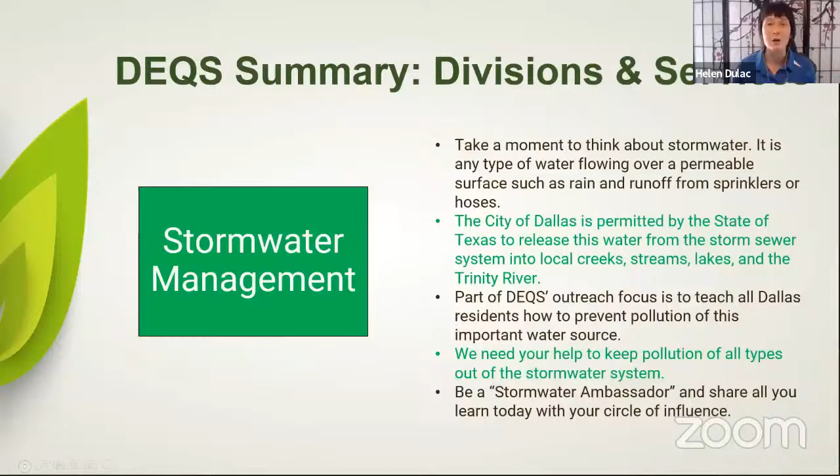So please just be mindful about what you're doing outside. Try to pick up that pet waste and also don't litter. And that's going to really help water quality for us and people along the Trinity.

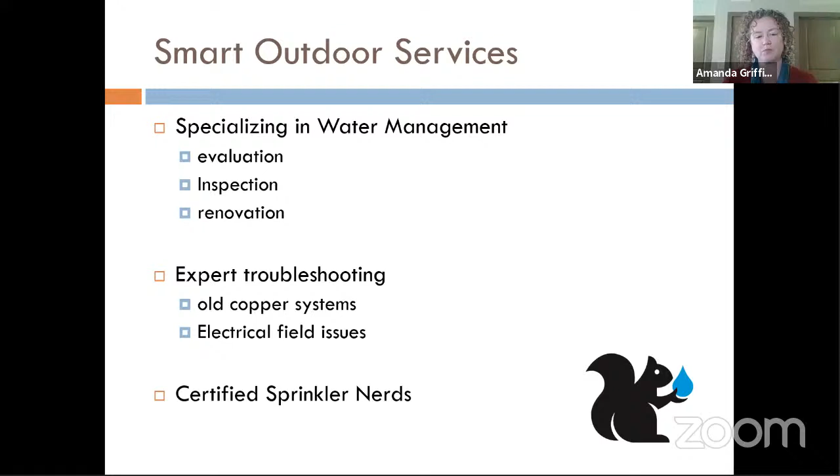And we're definitely certified sprinkler nerds. I always tell this story. When my daughter was about 6 years old, we sat down at the table to eat dinner, and she said, "Okay, what are we going to talk about other than irrigation?" Because my husband and I were talking shop all the time. So she put the kibosh on that, and we talked about something else. But we're definitely sprinkler folks all the time.

So today we're going to go over the basics of an irrigation system. I'm going to show you some of those things that if you have an irrigation professional come to your house, these are the things that they're looking for, they should be looking for. And I'm going to talk to you about what each type of component on your irrigation system does. We're going to talk about how each of those can lend themselves to water management. And then we're going to talk a little bit about troubleshooting.

I'm going to cover a little bit more troubleshooting in our next segment, along with some really good specifics about creating a really good irrigation schedule with your controller. So tune in for that next class on April 8th. But today I'm going to give you a great foundation so you really understand what your irrigation system does.

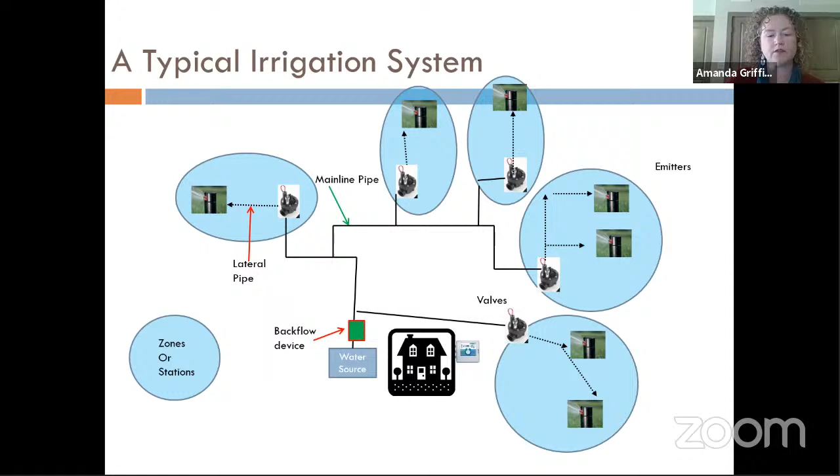So let's go to the next slide and talk specifically about our emitters. I'm taking you from the end of your system back to the beginning. We're working our way back. So first thing we're going to talk about is emitters. Emitters are basically just where the water comes out. There's several kinds of emitters: rotor heads, spray heads, micro emitters, and drip are also considered emitters. We'll talk a little bit about drip in just a few minutes. There are a lot of options in your emitters that can help you save water. The technology in irrigation has evolved to support water efficiency so much in the last 5 to 10 years that even if your irrigation system is just 5 to 10 years old, there's probably opportunities for you to retrofit some of your components and save water.

I'll give you an example. We retrofitted a system recently, a large HOA, several zones. We put pressure regulated rotors on those zones. So we took the old rotors off, we put the new pressure regulated rotors on. We ran a pre-test to see how much water those zones used before our project. We ran a post-test to see how much water those rotors use post-project. The savings was 34%. Those zones ran 34% less water with retrofitting just the rotor heads.

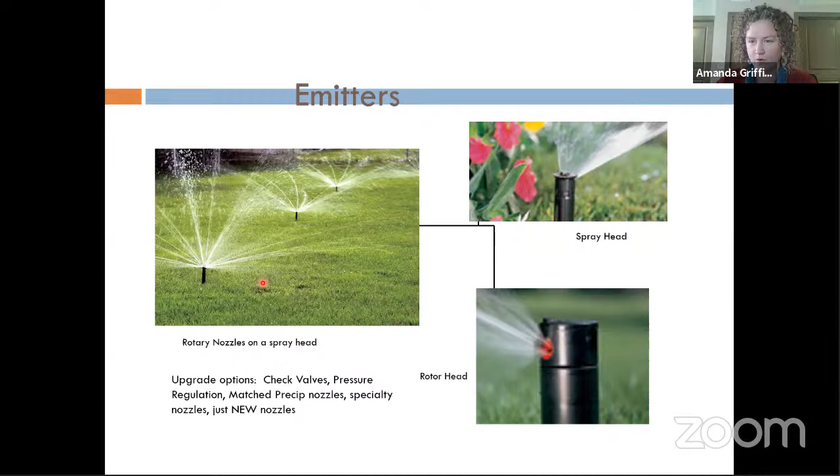But I tell people the bits and pieces that we use as irrigators, it's all little pieces of plastic. And so the price that you're paying for an irrigation upgrade or an irrigation retrofit or even an irrigation repair, the cost of the part is so small, but being able to pay someone with the expertise to use the right part in the right place is really what you're paying for with irrigation service. So, to switch from the very cheapest nozzle to a more efficient upgraded nozzle, you're looking at just a couple of dollars per nozzle sometimes. So I would say buy the most efficient technology you can afford, and it's going to help you in the long run.

There is a kind of nozzle called an adjustable nozzle. A lot of repair guys carry adjustable nozzles on their truck because they're so easy that one nozzle can be a full circle or a quarter circle, but those are the least efficient option. So just know that they're there. Sometimes you need it because you have a strange little slice that you're trying to water or a very tiny bed and you need that adjustable nozzle.

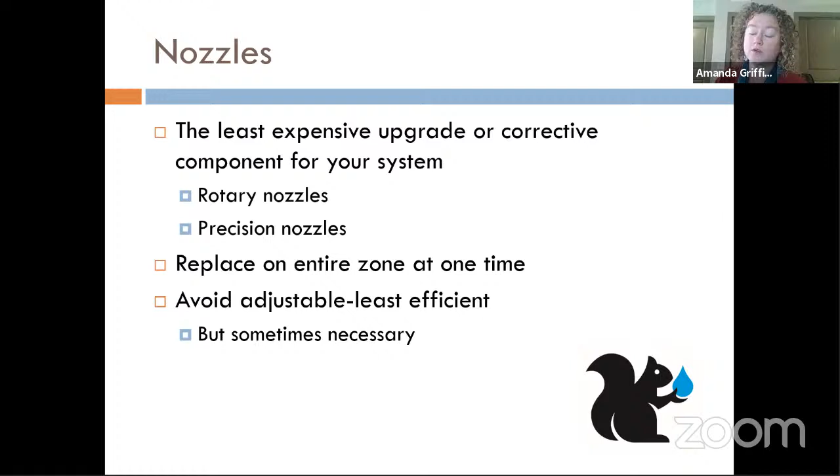But just know that even the most efficient adjustable nozzle is less efficient than a plain nozzle. So if you can use a non-adjustable nozzle, that's the option you want to ask for. But sometimes you just have to have that adjustable nozzle because that's the only way to eliminate a bunch of runoff on hardscape or something.

So the valves in our system, I call them the mysterious controllers of water flow that are really not that mysterious. So you should have one valve for every zone in your system, and they're electrically actuated. Now, if you have one of the original irrigation systems in the Dallas area from 60 years ago, you could potentially have valves in your system that are not electrically actuated. When John and I first started doing irrigation service, we found a lot of these valves still in the ground.

And, frankly, a lot of them were still working. At that point, they were 40, 50 years old, and they're not electrically actuated. If you have old valves like that, you're going to want to choose your irrigator carefully as you transition from those hydraulic valves to electrical valves.

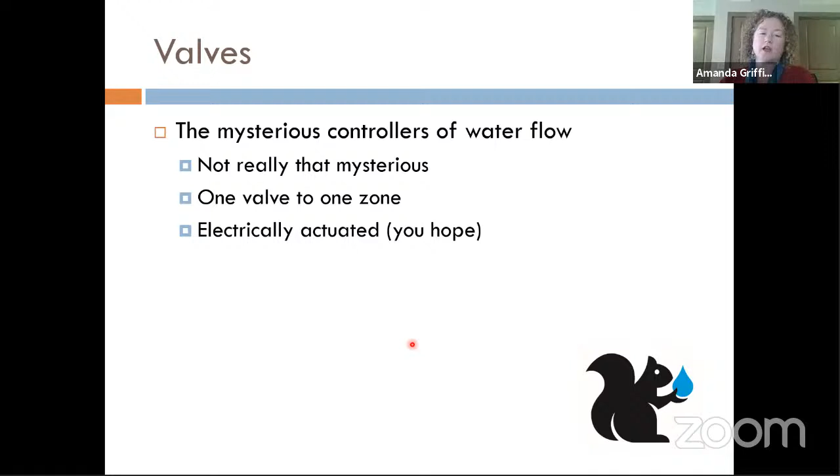But valves are pretty simple. They are controlled with electricity, and we'll talk about electricity in your system in just a little while. It's one of the least understood parts of the irrigation system because you just don't think about it. You turn sprinklers on and water comes out, so it's a water related system, but the electricity is a critical component to a successful irrigation system. We'll talk about that a little bit.

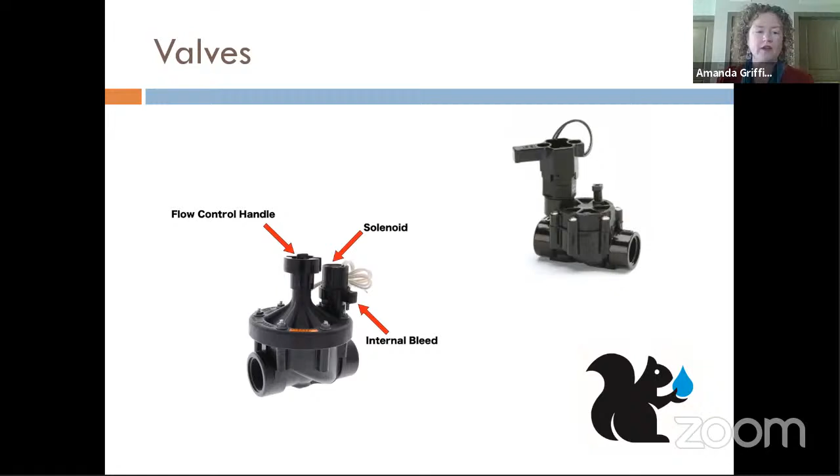So, you know, these will be in the ground. I've got a couple of pictures of valves in the ground for you. This is just another image of a different valve. I like to show different ones because there's all different brands, but basically they run the same way.

This is talking to you about how to turn a zone on manually with the solenoid. You can do that, but I don't recommend it because it's really easy to cross thread those when you're screwing the solenoid back in. And I would just leave that alone, because you've got your manual bleed screw. That's the point of that part on the valve. And you can use it to turn on that valve manually.

A lot of people don't know that, or they're just afraid to poke around in that box because they don't know what all that stuff is. And when you see those electrical wires, you get kind of worried, like, well, am I going to shock myself? You're not going to shock yourself. Even if you're touching the valve when that zone comes on from the controller, it's not going to shock you.

I do want to point out, see the screws here on the bonnet of this valve? Most irrigation valves can be taken apart and the internal parts put back in or replaced. And we call that servicing a valve. Servicing a valve is frequently a lot cheaper than cutting out a valve and replacing it.

So in the effort of making you a more savvy irrigation consumer, I want you to know that if you have an irrigator that says, well, your valve has failed, ask them if it can be serviced instead of replaced. It will save them time. A smart irrigator is going to be about it all day long, because if he doesn't have to dig a bigger hole and cut pipe and glue fittings and all those things, he should be happy to service your valve if it's possible.

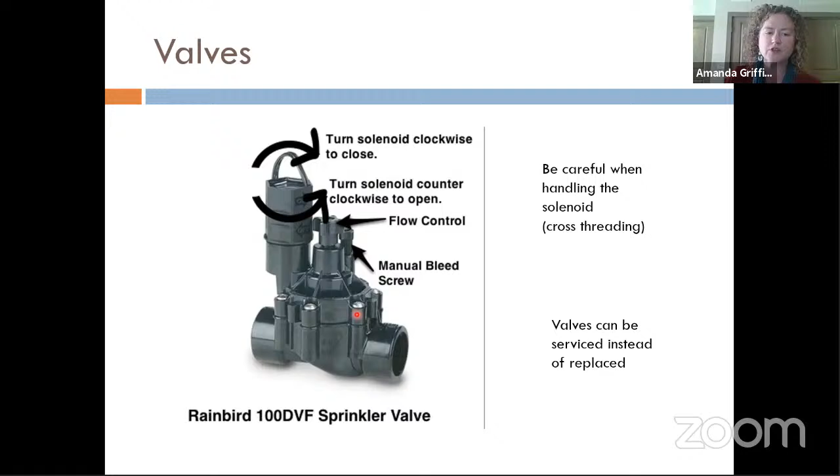Now, there are times when a valve will crack on the bottom, or the bottom part of this valve gets damaged in some way or run over, and then you've got to cut out the valve. But a lot of times valves can be serviced, and I think sometimes irrigators just default to cutting it out instead of thinking about servicing it. So I would always ask if the valve can be serviced instead of cut out.

So here's a good picture for you of your pipe in the ground. So this is a part of a system that's being put in. Actually, this was a photo of a repair. So I want to point out what we're looking at. This is a valve here. This is a valve. You can see that there's wire going between them, and then this wire keeps going here in the box. So we've got wire leading out.

The red arrow is pointing to your lateral line. The water's coming out of the valves. Well, actually, this is still main line. The water coming out of the valves and going through the dirt, that's going to an emitter. That's your lateral line. If you get a break in a lateral line, when that zone comes on, you'll see evidence of that leak, okay? If you get a break over here, and the reason I use this picture is because it's showing main line and lateral line in the same hole, okay?

This larger pipe here is your main line. If you get a main line leak, unless you have a master valve, which I'll talk about in just a minute, that water will be running all the time. That's when you're looking at getting a $600 water bill if you don't notice that mainline leak right away, because that water is just going to keep running and keep running. It's going to show up in your meter on your leak detector little triangle when you go out and look at the meter. That's a mainline leak.

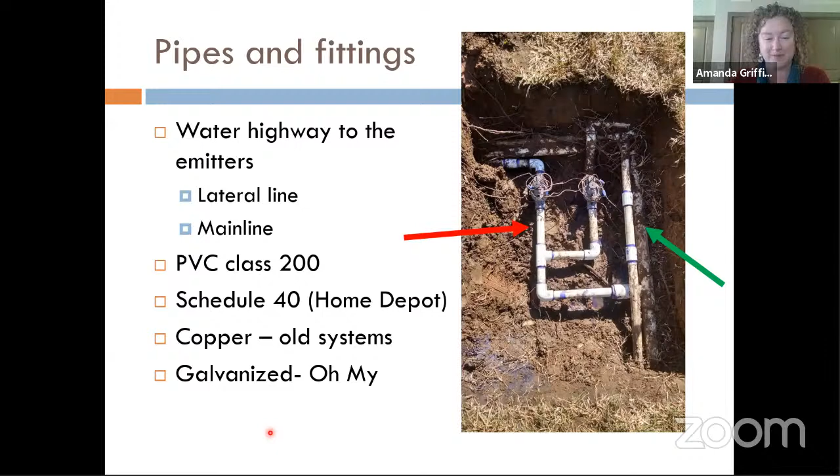Here's another good example of valves in the ground. Now, I will say that in the North Texas irrigation world, we would call this a Yankee system, because all of the valves are there together. And up north, they typically put all the valves in line together. And we call that a manifold. So those valves all put together as a manifold.

What is more common in North Texas is that they place the valve kind of in the center of the area that is served by the valve. So if you have a zone in the backyard, you'll have a zone valve buried in the ground somewhere in the backyard. If you have a side yard zone, that valve is probably going to be somewhere in the side yard area. Your valve for your front yard is going to be somewhere usually in the front area.

Now, I believe in the city of Frisco, they are tending more towards this sort of design where the valves are all there together. So you can see this is our main line coming in here. They've teed off to multiple zones. Here's all of the valves. They're all wired up, and you can see there's wire putting them together as well.

And then this pipe that's coming out from each valve is our lateral line. It's going down the road to the emitters, and that's what this looks like. Ultimately, this would probably be put in 2 or 3 jumbo valve boxes. So all this pipe will be covered up. You open that valve box, you'll just see this one little valve.

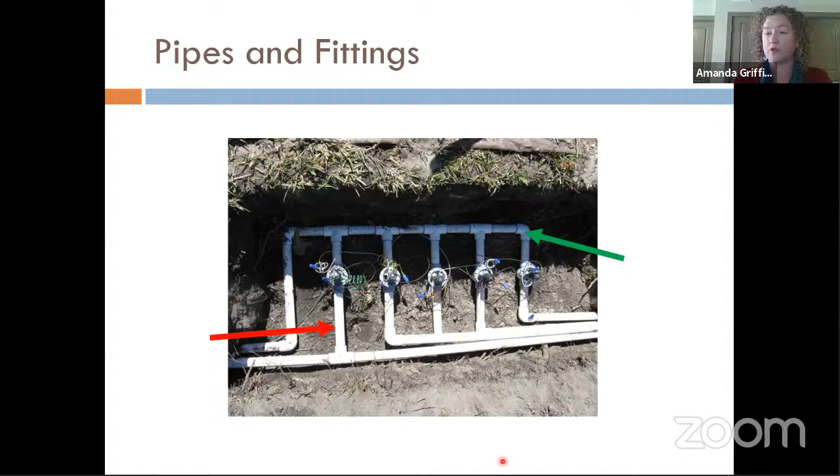Our technicians take pictures of everything. When they dig something up, they'll take a photo just to show the homeowner, this is what it looks like under here. And this is the mess that we had to deal with. So,

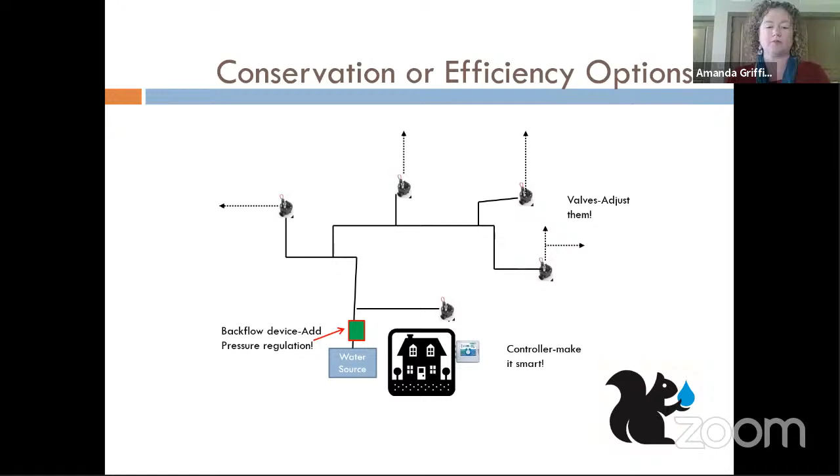we're back to our irrigation diagram here. And I'm also running out of time, so I'm going to move on. We've talked a little bit about efficiency options. We've talked a little bit about backflow prevention. A backflow prevention device is required by law, and it does protect our water supply.

There's different types. In North Texas, mostly we're looking at double check valves, and those are typically really close to your meter. They're the first component downstream from your meter. Right after that backflow prevention device, if you have a master valve, it'll typically be right there in line with the main line. What a master valve does is it kills water to your entire system when the system is not running.

So that makes the challenge of a main line lessened because your meter's not going to run all night long with your leak. It's going to be cut off by that master valve. Mainline leaks are still a problem, but a master valve can definitely help.

All right, let's talk briefly about electricity in the system. People understand the electricity part of a system the least, but a wire runs from your controller to every zone in your system. A lot of times it follows in the same trench as your pipe, because when they install it, it's open, they put everything in the trench and then they cover it up. However, if you've added a zone later, or the homeowner before you added a zone later, or had to move a zone to make room for a deck or a swimming pool, electrical wire could be anywhere in your yard.

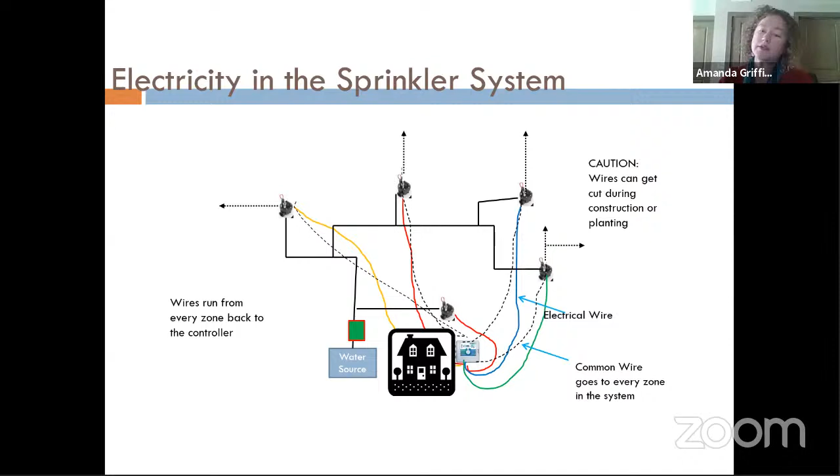Because what, am I going to come around and dig around and try to find the problem in your brand new, beautiful landscape? So I always encourage people to check out these things first before you do a project. And here it is, right in black and white. Tracing that wire path before a construction project can save big, big money.

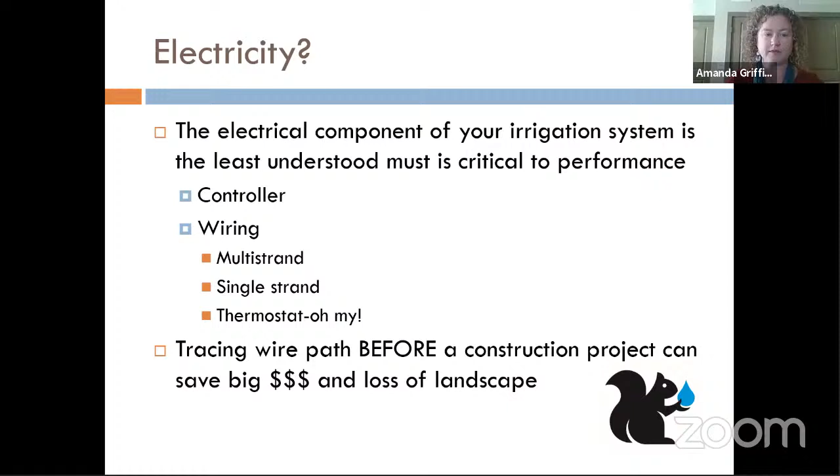Controllers, we're going to breeze through controllers because I know I'm running out of time. And when you tune in on April 8th, I'm going to talk all about controllers. We're going to talk about different kinds of controllers. We're going to talk about creating a good, efficient landscape watering schedule.

But what I want you to know about controllers today is they're definitely the brains of the system, but they're only as smart as the guy that's putting the instructions in. So if you have a good irrigator or landscaper who's conscious about water and conscientious about using water in an efficient way, then you're going to be good as gold with a smart controller or a dumb one. A lot of people are worried about getting a smart controller, but you can do smart things with a regular controller as well. And that's the things we're going to talk about on April 8th.

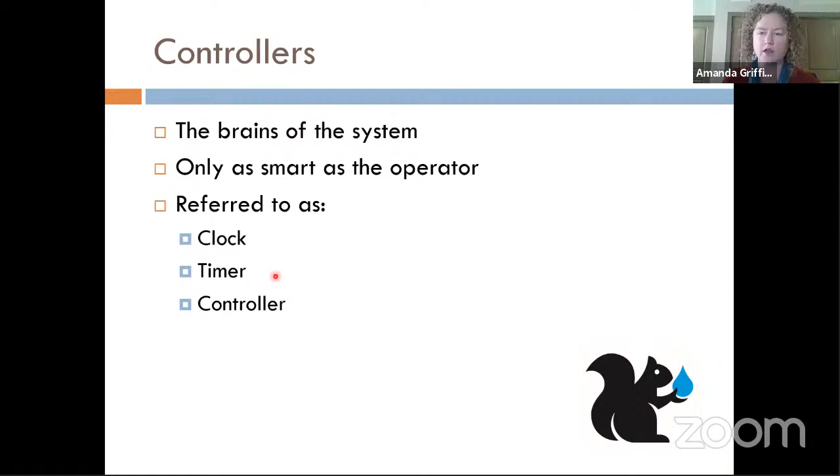Some irrigators call them a clock. I've also heard them called a timer. That's typically up north. They call them a timer, or you call it a controller.

We'll talk a little bit more about controller advanced features in our class coming up on April the 8th. Additional components that I want you to know about are rain and freeze sensors. Those are required by most cities, including Dallas, I am sure. They work great for a while. They do require maintenance, and they typically don't have a super long life.

So rain freeze sensors are really simple machines. Most of them are basically wine corks in a column. When the wine corks get wet, they get fat and they cut off the connection so your system doesn't water. When those wine corks dry back up and shrink back down, your connection is restored. Over time in our hot, humid Texas summers, those wine corks get hydrophobic. They lose their ability to really absorb.

What that means is you've got to get a lot of water on them in order to activate them, or you need to get lots of slow rain in order to get those corks fat enough to cut off the water. So we typically dial ours down to the lowest setting so that they'll cut off with the least amount of water. And that's a regular maintenance item: when we go look at a client, we check out their rain freeze sensor to make sure that it's working.

They're also not super expensive. They shouldn't be super expensive. They're the number one thing to help you save water when we've got rain coming in. Also, remote controls, we'll talk a little bit more about that. All right.

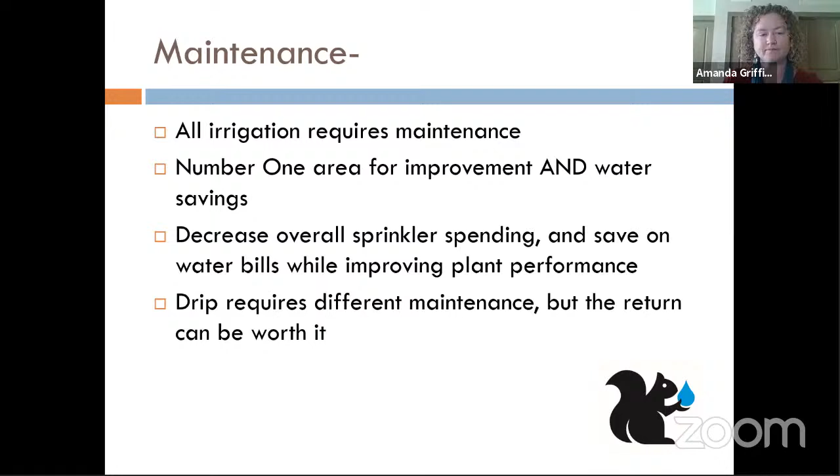So troubleshooting, I'll cover some more about troubleshooting when we're talking about controllers, but the main point I would like to make is avoid the trouble if you can. Have that irrigator come out and take a look at whatever kind of project you're starting. I would hesitate to just think that the landscape person is going to do it, because a lot of times they are single-minded and what they're thinking about is plants, how many they're going to sell you, how many you need in this area, and how they're going to get them in the ground.

And irrigation is a lot of times secondary to them, but homeowners think that they're thinking about both things. So then they spend all their money on a landscape project, and then the landscaper gets his money and goes on down the road, and then they are left with an irrigation problem. And they've already spent all their money on plants. And so they're in a bind. And then I have to come and deliver the bad news that they're going to have to spend even more money to fix the irrigation. Having your irrigator in early will save money.

But I tell my clients, whatever kind of project you're planning in your yard, add 20% for potential irrigation changes. It's a good rule of thumb. Just plan on it. If it's a $10,000 landscape project, just go ahead and budget 12 so you'll be ready for those irrigation issues when they happen. Don't be afraid to call for backup. We'll talk a little bit more about troubleshooting.